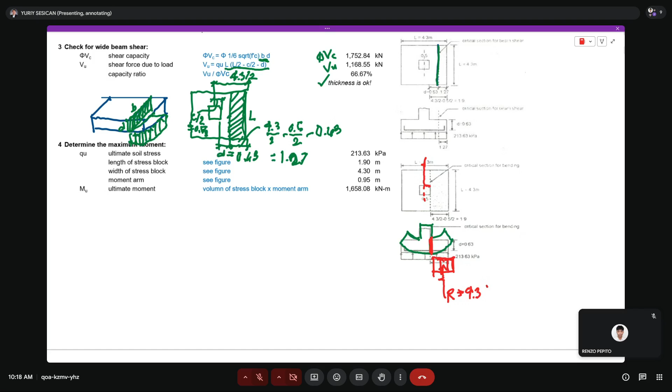4.3 times 1.9 - this one is 4.3. Just deduct the 4.3 minus, divided by 2, minus the C over 2, or the column size divided by 2. You deduct this portion so that you can get this. And this is 1.9. So 4.3 times 1.9 - that is the area.

And then multiply that by the QU. So that is your reaction. And then your moment arm.

How much is the moment arm? Moment arm is simply 4.3 - hold on, this is 1.9. So 1.9, over 2, because the reaction sits at the center of this load or pressure diagram.

So you will generate the ultimate moment, the volume of the stress block, which is this one. Let me give it another color for emphasis. The volume of the stress block, or the total reaction, times the moment arm. And the moment arm is this value here, 1.9 over 2.

Hopefully using your calculator, you will generate this answer. So that is your MU.

And because the footing tends to bend upward, we need to place rebars there. We place rebars so that it won't crack, because normally wherever the bending is, that's where the crack happens.

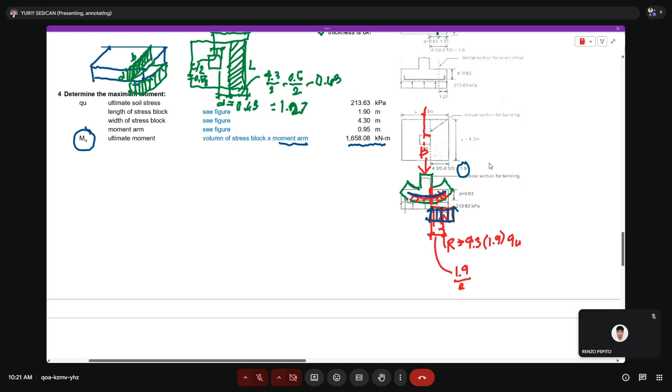So now our ultimate goal for this exercise is to determine the number of rebars. From here on, this is just somewhat like beam design. So then we calculate the reinforcement.

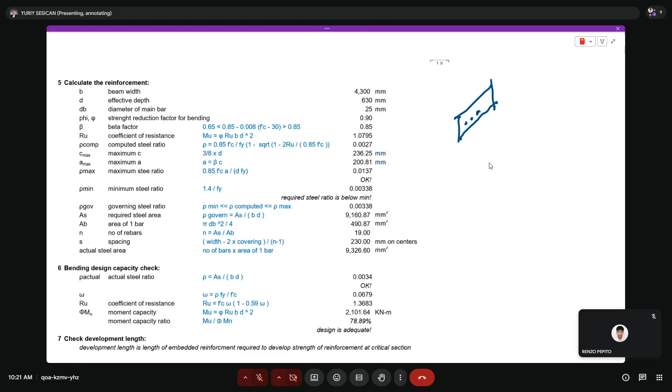So the width is now 4.3. Let me just draw it here. So this will be your reinforcement. If we cut the footing, we can expose the B and the D and the reinforcement.

So the quantity will be based on the beam calculation. Your width is 4,300 mm, your depth is 630, diameter of main bar is 25.

Phi, or strength reduction factor, for beam is 0.9 for tension controlled. Then for the beta factor, use this code formula. It should be not less than 0.65, not more than 0.85. Calculate using this formula and then compare with the minimum and maximum limit. So in this given, our answer is 0.85.

Next is the coefficient of resistance. We know that MU equals phi RU BD squared. So the purpose of this formula is to get RU. So this is our RU.

And then we use the formula to generate the computed steel ratio, or the required steel ratio. This is the formula that I gave you. Just plug in all the values and whatever your RU is, plug it into this equation or formula. So you get 0.0027.

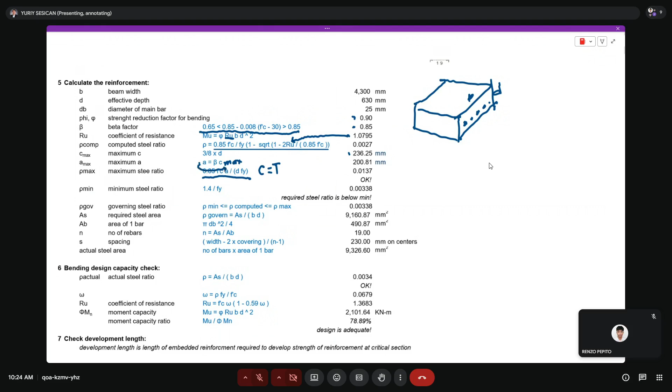And then compute. So the maximum steel ratio is 0.0137, so it is within the minimum and maximum. The minimum is 1.4 over Fy, so 0.0033, and the maximum is 0.0137, and our computed is 0.0027.

So comparing 0.0027 and 0.0137, this is within the maximum. But looking at the minimum, 0.0027 is less than the minimum. And the minimum as computed is 0.00338. So therefore, use the minimum value.

So the steel ratio that we are going to use for design is the minimum value, since the computed one is very small. This means the moment is small, the load is not too big, so it's below the minimum. It's stated in the code that the minimum should be 1.4 over Fy, so we have to use the minimum for our design.

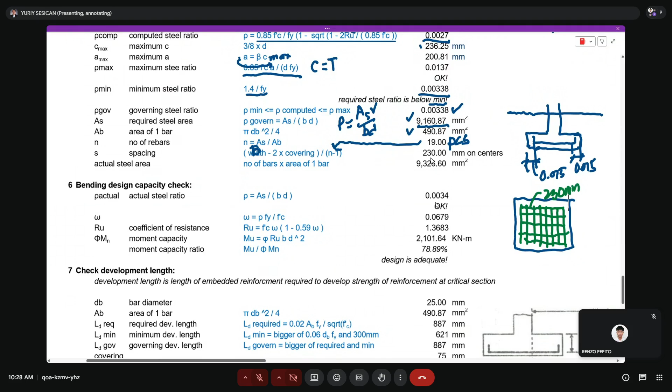So the actual steel ratio now is AS over BD, so 0.0034, and then compare it with the maximum and minimum. It's okay for the maximum and minimum.

Then compute using this, these are just code formulas. RU is equal to FC prime times omega times 1 minus 0.59 times omega, wherein your omega is this. So just plug in this value and you get 1.36, and then plugging into the mu equals phi RUBD squared formula, you get...

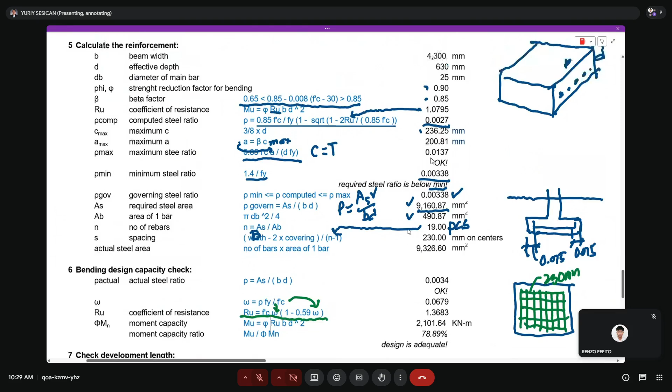2,101.64 kilonewton meter. And what is the maximum moment? The maximum moment is 1,658, and the capacity of our section is 2,000.

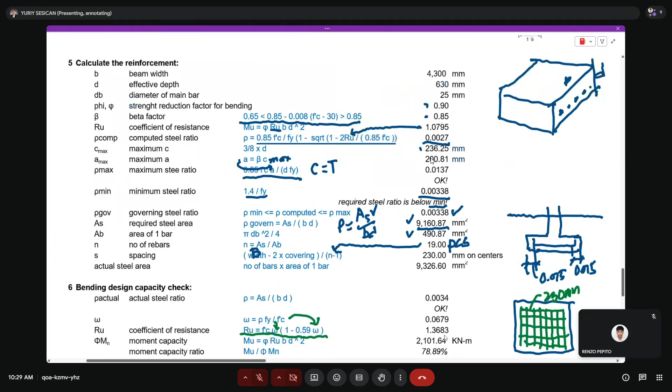So 1,658 over 2,000 is just 78%, meaning you still have extra strength for your designed footing. So again, this one is your force or moment due to the applied load, only 1,600.

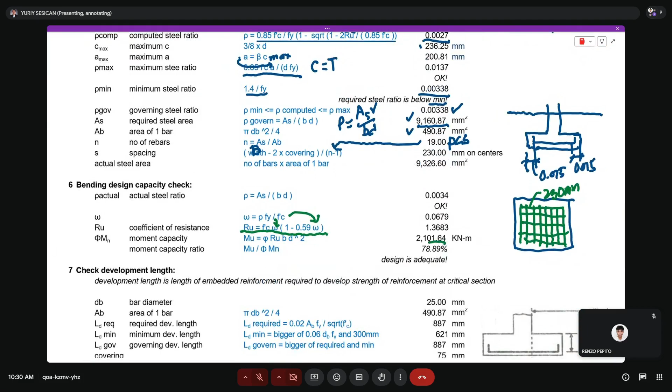And this is the moment provided by your section. This shows how strong the section is compared to the force applied. So dividing that, you will get 78%. If it's more than 100%, meaning your force is bigger than the capacity, then it's a failure. So this means your design is adequate.

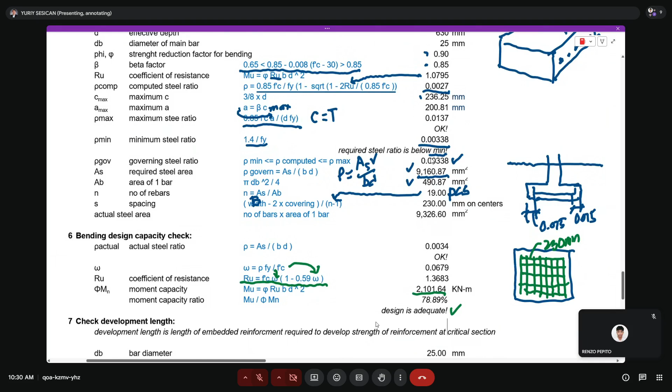Next is to check the development length. These are all just code formulas. What is development length, by the way? It's when you hook the footing rebar at the side.

It's hooked to make it anchored. Why hook it? To anchor your rebar so it can develop its strength. Anything that is not anchored will not develop the proper strength—it's like it can be pulled out since it's not anchored, it can slip. But if it's anchored well, then it can develop its strength properly. So hence you have to create the development length.

Okay, let's go through these formulas. LD required is 0.02 times ABFY over square root of FC prime. Simply substitute, and then LD minimum is the bigger of 0.06 dB fy and 300 mm.

So you have the minimum, and then LD governing is the bigger of the required and the minimum. So required versus the minimum: the required is 887, the minimum is 621. Therefore, the governing is the bigger of the two, so 887 mm.

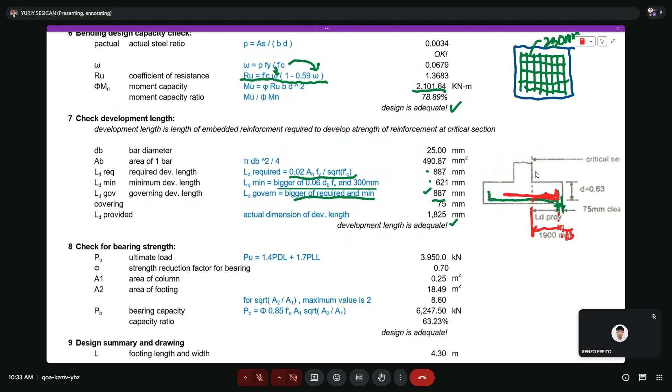But it's awkward to cut it right at that point, so we extend it and probably hook it to the side if it's still lacking. In this case, the required is 887, and the space provided as per the geometry of the footing is 1,825, that is 1,900 minus 75, so it becomes 1,825.

Next is to check for bearing strength. Now again, in your problem for your quiz, make use of the 1.2 and 1.6 load factors, that's the new code. For this example, to be faithful with my old resource, which is still valid until now, and so we can have matching answers, I'm using the 1.4 and 1.7.

Alright, so check for bearing strength. Now, the footing, due to the weight of the column, the load is so large it could crush at this point, fail at this area. Meaning the footing cannot bear the load of the column. So to prevent that, we check for bearing strength.

And then the area, we calculate the area for the column, and then we calculate the area for the footing. And then check square root of A2 over A1, with a maximum value of 2. So the value here is 8.6. And then for the bearing capacity ratio, it's governed by this formula.

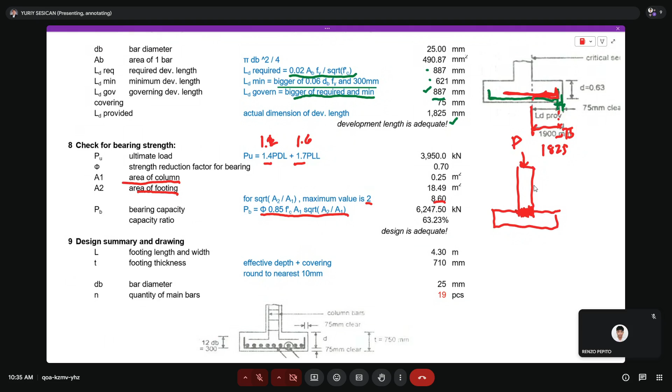This is just a code formula. So it comes out to 6,247 kilonewton. This will be the bearing strength of that portion of your footing. And then the ultimate load is only 3,950, versus the 6,247, so it's clearly bigger.

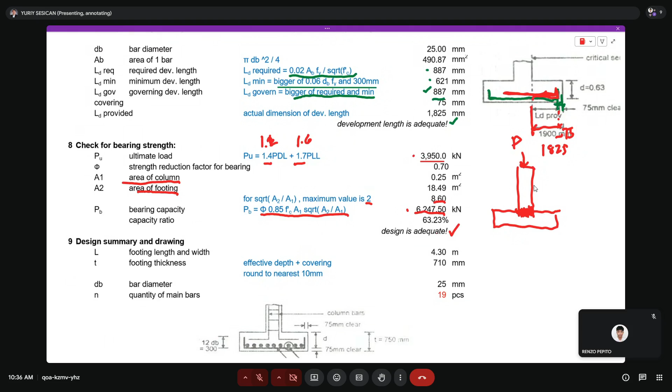The capacity for bearing is bigger than the load. So dividing the load by the capacity, it's only 63%. So this is adequate. If the load were bigger than the bearing capacity, then the design is a failure.

Okay, so lastly, we check and draw the figure, because we want to communicate it to the construction workers. So how do we communicate? We produce the plan and draw the elements. So what do we draw? The footing itself we draw, and then we also draw the rebars.

So if there are 19 pieces, you draw the 19 pieces. Then you label it as 19 pieces of 25 mm. You also draw the D. Then you know that the D is still at the centroid of the rebar, and you still have the clear spacing, so you now specify the total thickness of the footing.

So here the thickness is 750 mm, because the D is 630, then plus the clear covering plus the portion of the rebars, it will be 750.

In actual practice, we aren't that strict with it. You can add 100, let's say 630 plus 100 or 150, just to account for the sizes of the rebars as well as the covering. So you can use 750 or even 800 in the actual designing and drawing process of the plan, as long as it's not lower than that.